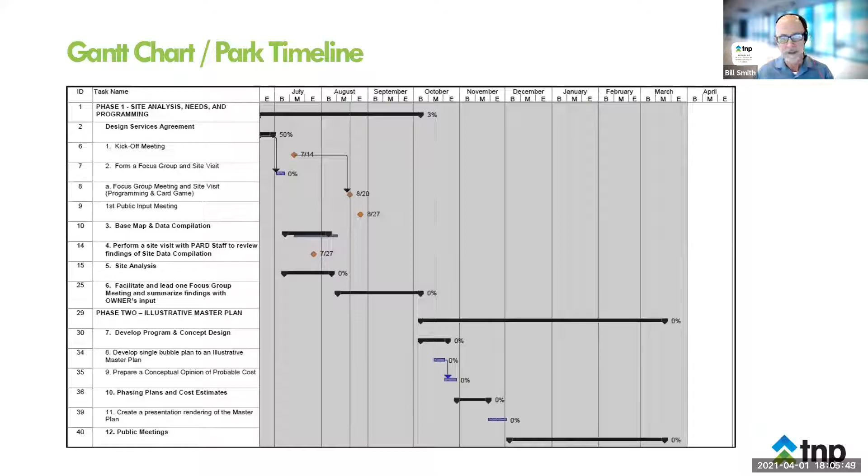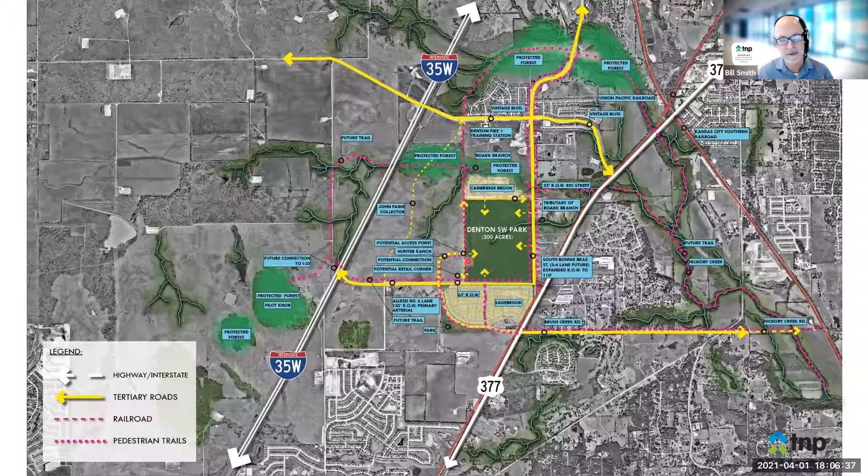You notice there's an assortment of green blobs around the site — those are protected forest areas within walking distance of the site. These little purple dots are all connected future trail systems. Hickory Creek will have trails coming that connect to our park and through all these future neighborhoods.

Of the 4 roads around the park, we think Allred will be the busiest. We proposed a road to go along this west side because it's much easier to manage a park that way — it's safer, with more eyes on the park as people drive by and see it, and it's more accessible. So for that reason, we proposed this, and it works well with what Hunter Ranch is also doing. These other 3 roads — this one's existing, Allred's existing although unpaved, and this one's proposed and being built as we speak.

Again, you can see the purple dots, these kind of magenta colors — those are future trails. They'll connect to Hunter Ranch, all up and down Bonnie Brae and down Hickory Creek, and also the subdivision to the south.

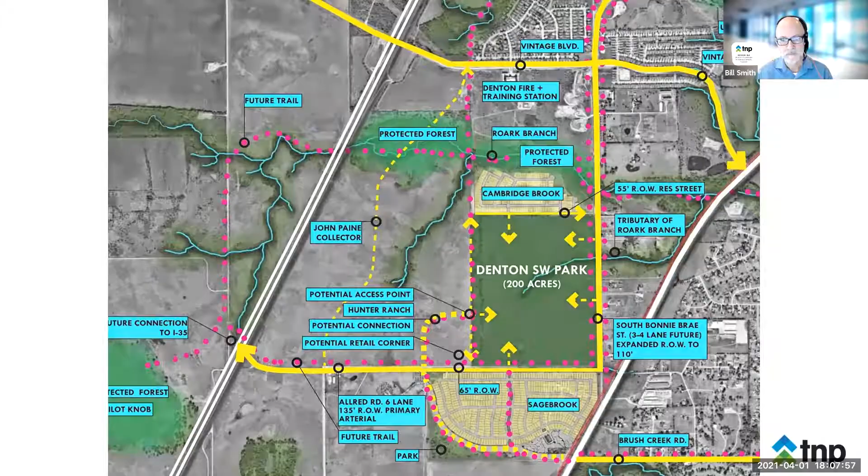So what we did in phase one was that we did a lot of polling of the public, and we're going to talk about that now. Mick, feel free to kick in at any time. So what we wanted was a balanced approach. We didn't want to get all our data from one place because then that might skew it.

So the first part, we had Denton focus groups, public input, surveys, and the Denton Parks and Recreation Open Space Master Plan, which is ongoing. We also looked at best practices: what do we know that works in the industry from doing park systems and parks throughout the decades? What works? And then also balancing that with executive input from the Parks Department, Park and Recreation Board, and the volunteer focus group. You just saw that list a moment ago. So all those things, we find it's safer and more accurate to do a balanced approach.

So the data collection included 1,200 general resident responses and online preference surveys. It's part of the master plan, the park system master plan. We had 2 public input meetings where people responded online and ranked in order of importance the things they wanted to see go in the park. And then we had 2 focus group meetings where members representing different parts of the community also ranked different program items that might go into the park. And then we had emails, phone calls, face-to-face discussions with citizens throughout. So we were really trying to hoover up as much data as we could so we could get a broad representation of the city.

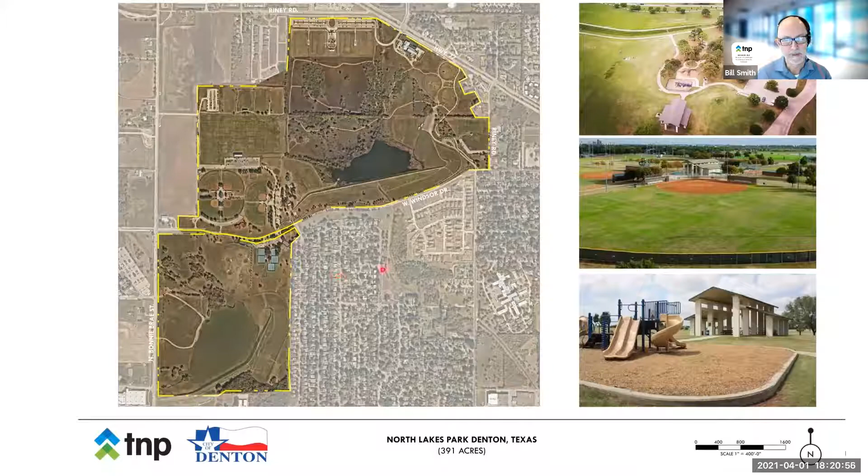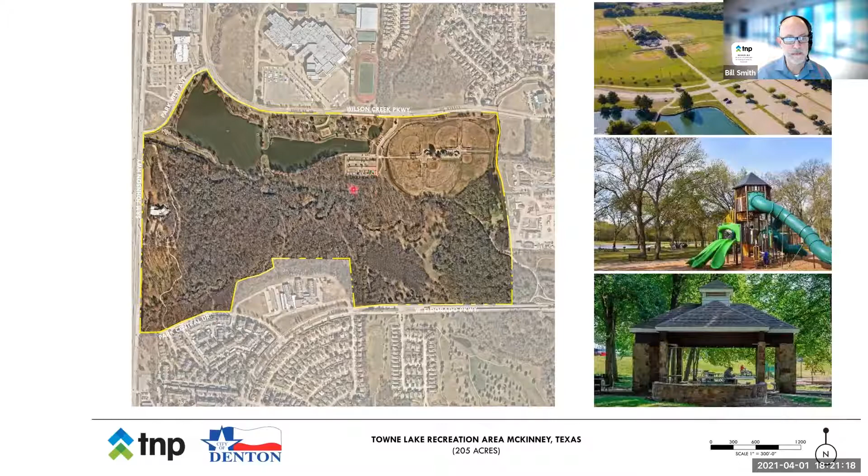And then the next one is Towne Lake in McKinney. It's almost exactly our size, 205 acres. Again, it's a mixed use. We find that with a lot of these large parks, a diversity of uses works well. It helps them balance out, so there's something for everyone there. You can see this one is mostly natural at this point, but it does have some active area for parking. Again, almost identical to our size site.

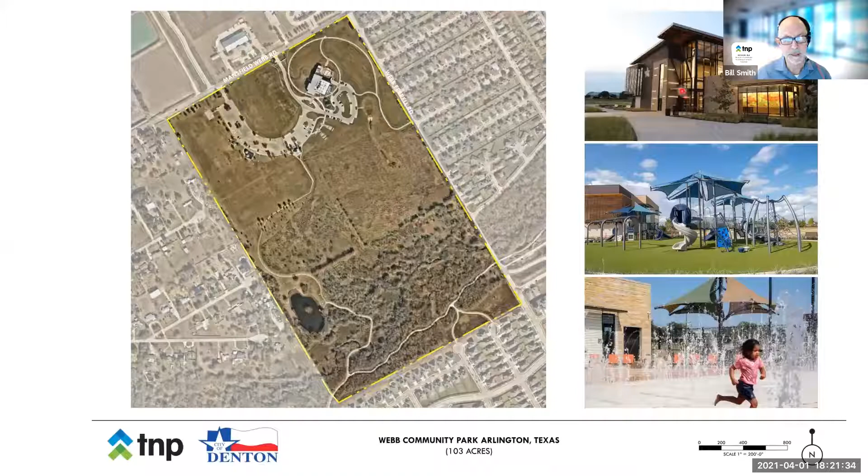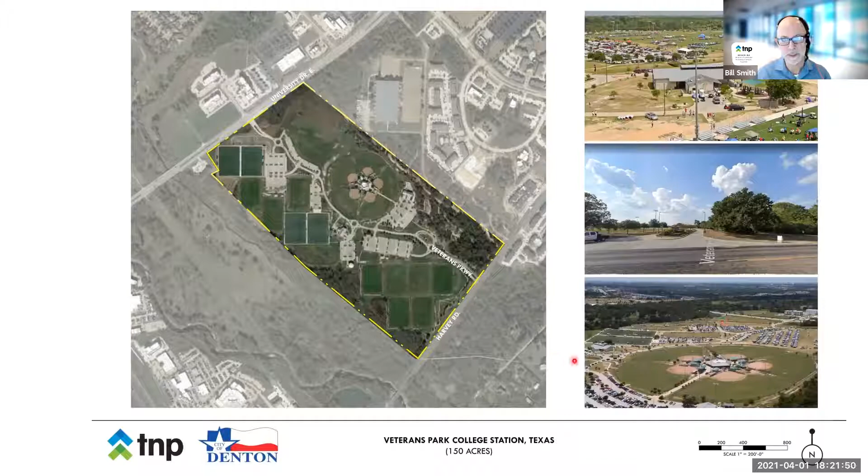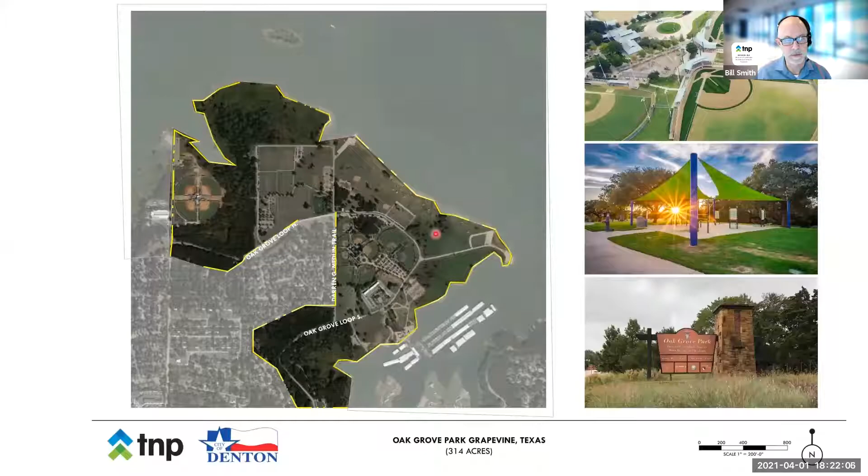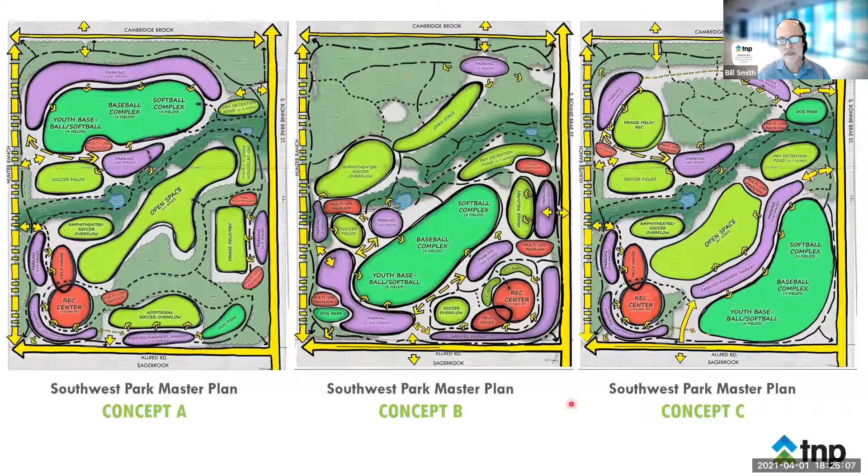So then we went and took it to the next level, and that's where we started to actually develop a plan. I'm going to show you that, and we'll spend some time on it. We'll come back to this too, so don't worry if we go too fast.

So here's the master plan. You can see how this is really concept C, just fleshed out a little more. This is the more natural area on the north, and we'll get into that. This is the more active area here on the south with the baseball softball complex. And there's the indoor area here with the rec center here and this lawn you look down.

What you start to see is we have these axes, where you have this view down this lawn, and another axis through the center of this baseball softball complex across this redeveloped cow pond - now it becomes a nice little natural pond - to some pavilions across, and then a big blackland prairie. 150 years ago, this area was mostly blackland prairie. A lot of that's gone now.

So what does that look like? That looks like this picture here on the left. And I've got a PDF I'm going to go to.

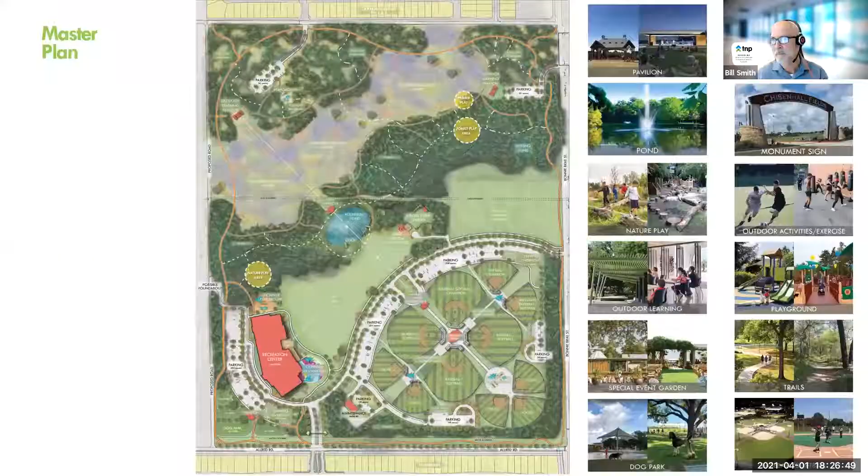Sorry for the pause, but I wanted to show you this PDF. It'll be higher resolution than what we had before. Can you see that? Yes, okay, so all right.

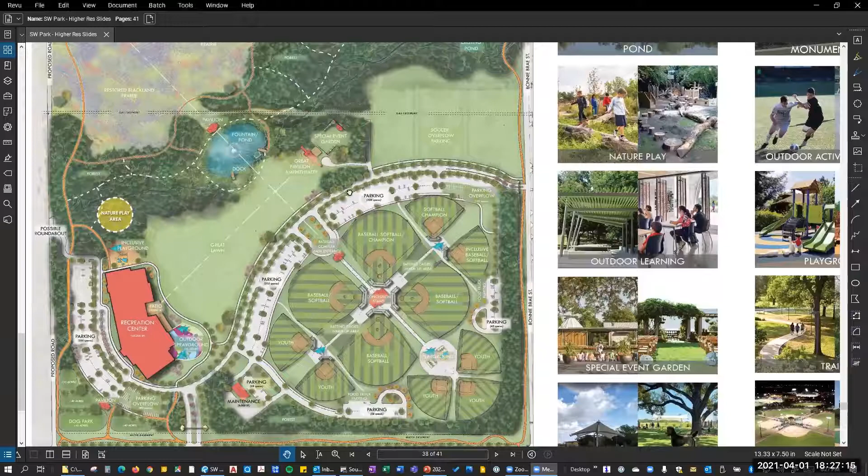So this is the plan overall, and you'll see this restored Blackland Prairie up here. So what does that look like? That looks like this right now in the spring. This is what Texas looked like for thousands, and maybe millions, of years before everything was developed.

Hey, Bill, can I jump in there for a second? Doing a master plan like this is a very good idea. It's important, so that we know how to manage this land. I just want to manage expectations by those listening that we want to see some Blackland Prairie come in. It takes a long time. It took eons for it to develop, and it didn't take long to destroy it. It's going to take a while to get it restored again.

And that puts a ton of pressure on guys like Drew and John from the Parks and Recreation Department. I just want to make sure everyone listening knows that's the intention, so it informs them about how they make decisions about mowing, pest management, that sort of thing. It's not going to happen overnight, it's going to take a while. But if everybody understands that and is patient, then we'll get there one day, and we'll all get to enjoy that.

Also, these wildflowers bloom certain times of year, and then the rest of the time they go to seed head, and they're going to drop their seeds and maybe look kind of rough, and that's just part of it. A lot of people might have a different expectation about that, but just putting that seed in everyone's head that this is going to take some time.

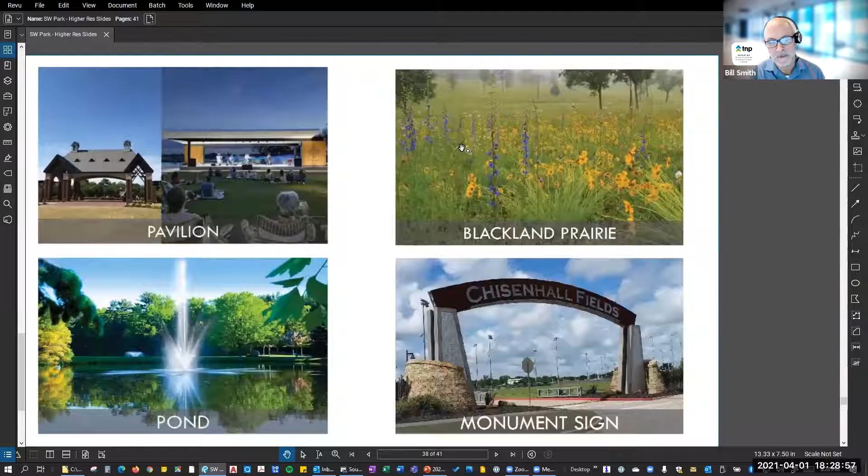So, all right, let me go back here. So you can see this great lawn here. You can see the scale — it's about a quarter mile from here to here, just to give you an idea of the scale.

And that's really important too, because people are going to want to gather — in small groups, and in large groups at times. This gives a lot of flexibility, that great lawn. And if you look at the way the parking is laid out, it's smart to put parking that's going to serve dual purposes, as opposed to just one purpose, serving here and here.

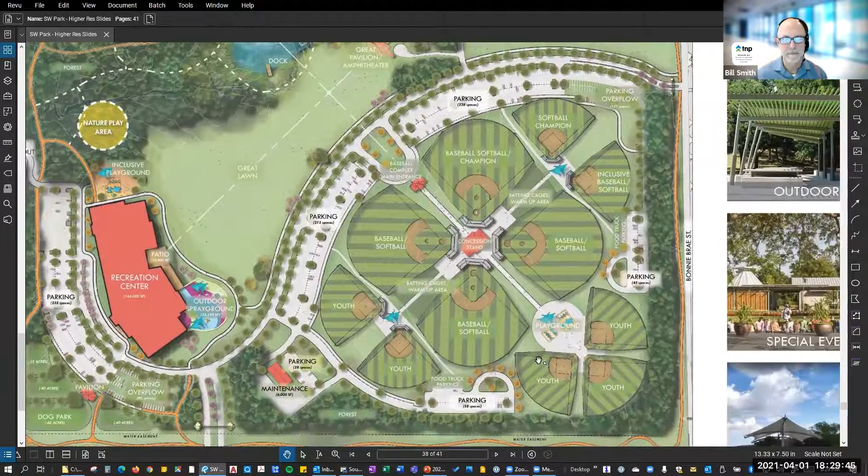I think that's where you were going, Bill — that athletics is going to require a lot of parking, but so could the great lawn, maybe at different times. The idea is to try to get it served, right. Yes, and it saves cost — getting dual use out of the parking saves the city money too. Because if this was only for the baseball/softball complex, it'd only be used when that's being used, but being used for both means it can be used all year round.

So here's the rec center. We'll talk some more about that, with an outdoor spray ground and an inclusive playground here. There's a dog park located here on the corner. We think this will be very popular.

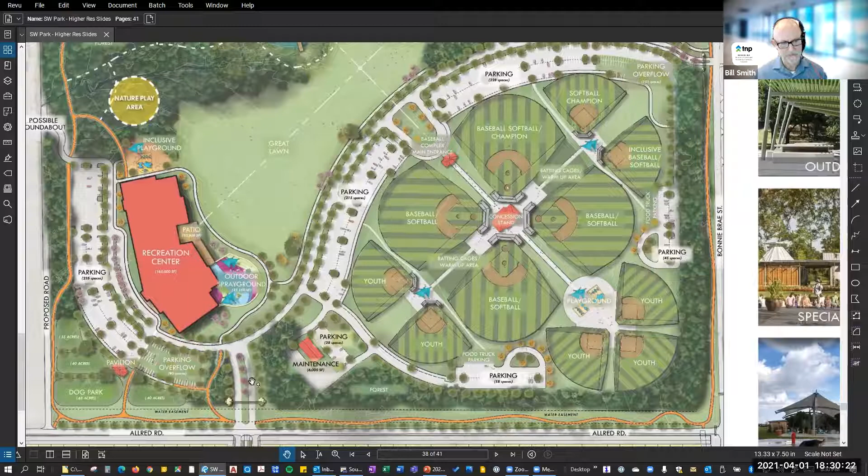And that's how cities are put together in big planning modes. There's a retail component across the street that's proposed as part of the future development. So you can imagine if you got your Starbucks or whatever boutique coffee, or maybe lunch, and you take your dog, you can go over to this park that just feels like it's got a good urban-to-suburban connection to that retail, which we think is going to be a driver and really help both the dog park and the retail.

Kind of a good idea there. You can get a sense of the scale here. These are individual lots on this Sagebrook development that's going in.

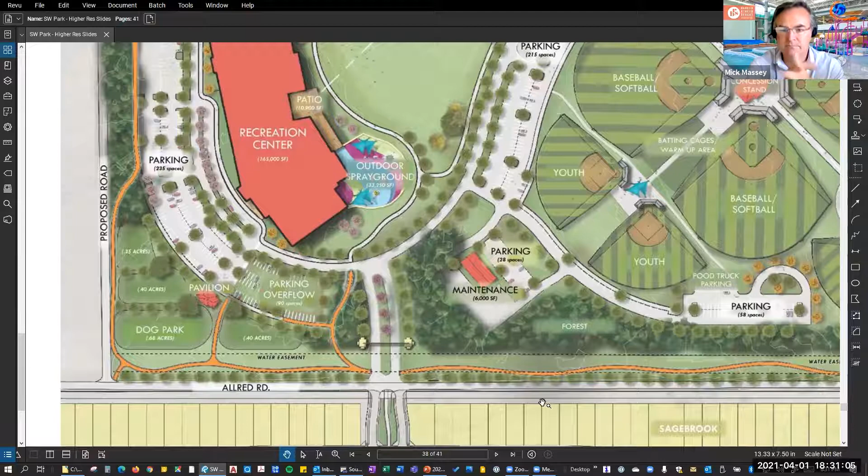Drew, you wanted to say something? Yeah, Mick, we found out earlier this week that may or may not happen in that corner next to the dog park. That'll be a future discussion with the Hunter and Cole section. And that's a very good point. This is a conceptual master plan, and things could change over time, like you just pointed out. So we all have to keep a mindset that we're going to be flexible and try to get as many of these elements to come together. Thanks for bringing that up, Drew. That's a really good timely point. Things will change. We can say that with confidence.

This is the maintenance building. We want to locate it close to these fields so it makes it easy to maintain. And that's really important. If you want a nice park, you have to have a good maintenance facility.

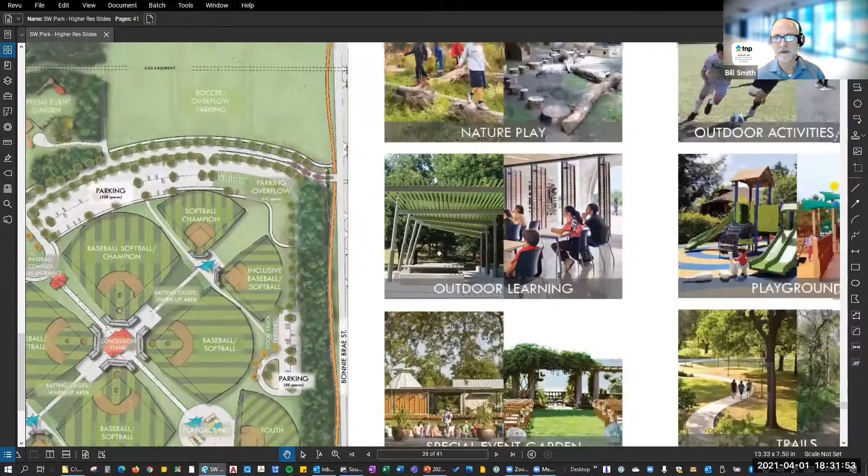This is the entry here, and you can see this grand kind of entry. So what are we talking about with that? You saw this monument sign, something like this, Chisholm Fields. It makes a real statement about entry.

The pond, this is about the scale of the pond we're thinking about, and the fountain is about the scale we're thinking about.

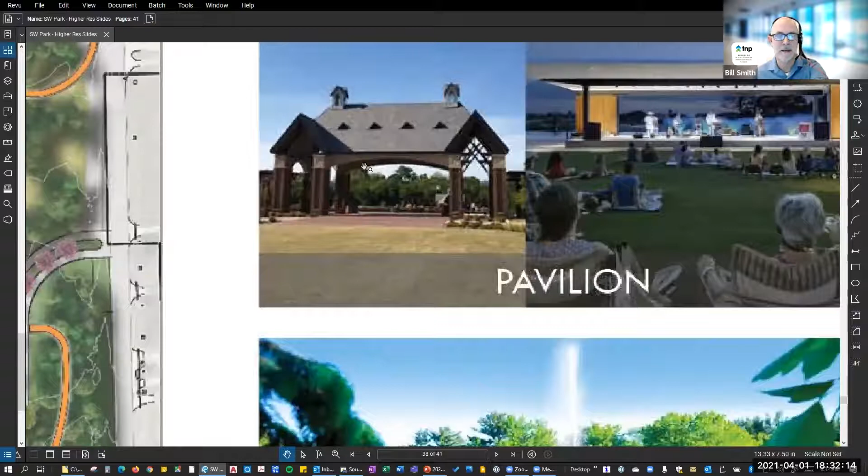This is a pavilion, and this is about the scale of the end of the lawn. If you look down the rec center a quarter mile away, you'd see something like this scale to terminate that view and provide an outdoor amphitheater.

This is what we mean by nature play, less structured, more naturalistic materials where kids can use their imagination. And outdoor activities, Mick talked about outdoor activities happening outside the rec center. This is a good example of that.

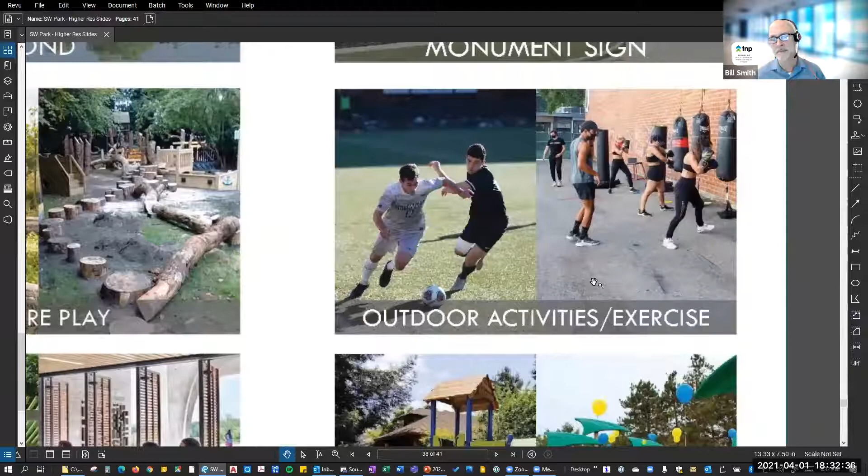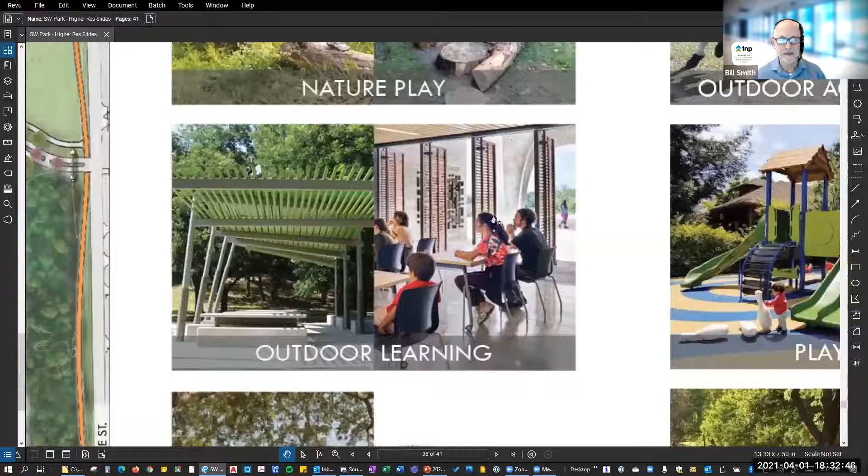Playgrounds, both regular and an inclusive playground is what we're talking about for that. Outdoor learning can be something that's completely outside or something that's indoor-outdoor where you can use it for education.

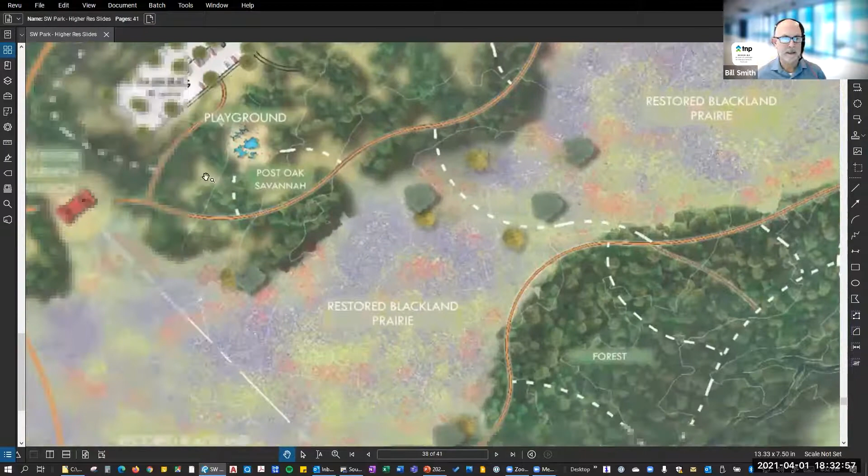And let me show you where we have that on the plan. We have both here, outdoor learning pavilion here, here, and it could even be part of the rec center also there.

So Bill, can you show the soccer football fields? Yeah, there's the soccer, 3 full-size fields here. Could also be used for overflow parking if you so choose. There's a gas easement here. You can see those dashed lines. You can't see it at all, in fact. But there's a gas easement that goes through that.

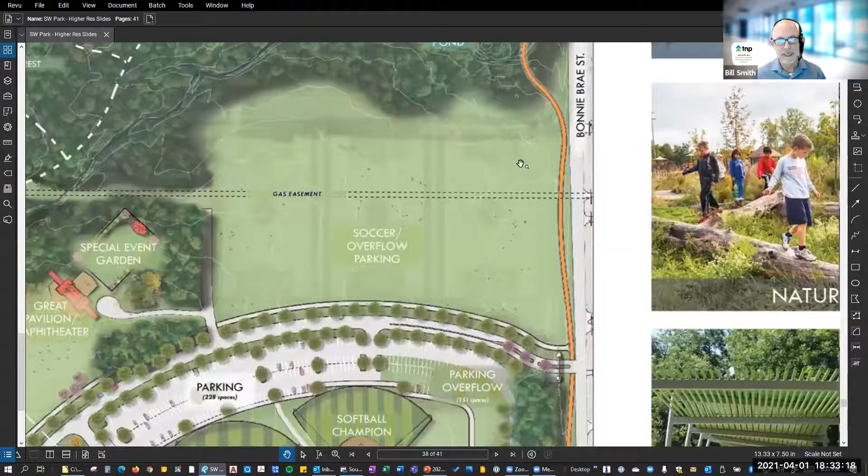So we located that here. So if you did have a big event, say 4th of July, on the lawn here, you could once or twice a year use this as overflow parking if you decide to.

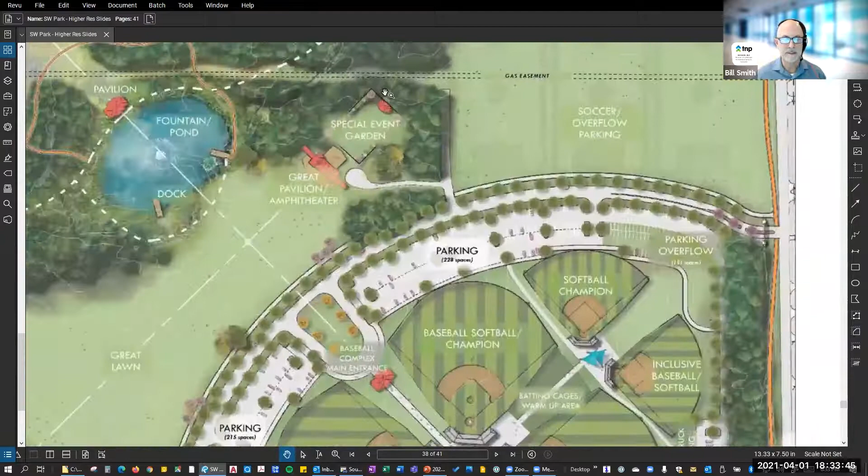Then behind this, again, one of the things we're trying to do here is get as many different things in. The special event garden here, small, maybe a formal garden behind this great pavilion. The city can rent it out for weddings or graduations or whatever.

And we're thinking something like this for special event gardens, something more this scale, which could be more like, I think John said earlier, a botanical garden. This might be a more highly maintained space where there's things in bloom, where people want to rent it because it's really pretty.

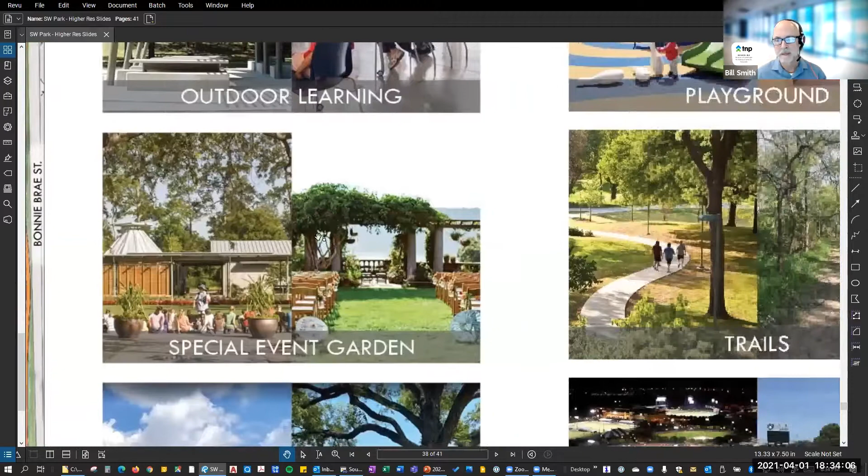And then we talk about trails. We have both paved and unpaved. On the plan, we've indicated the paved trail in orange. You'll see, first thing to notice, there's a 2-mile, almost exactly 2-mile loop that goes all the way around the park here. And then these little white dashes, those are intended to be unpaved. We have both of those.

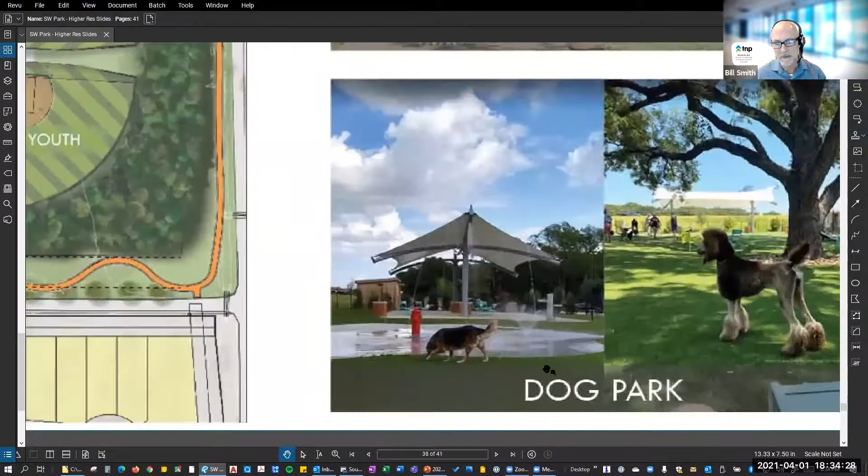And then the dog park, this is the one in Grapevine where you have the synthetic turf. It's very popular. They have both synthetic turf and regular grass. The synthetic turf proved to be a lot more popular with the owners, at least. The dogs don't really get a vote.

And baseball, softball here, and you know what that can look like. Let me just go through some more elements of the plan, and we can come back to it later.

Again, there's the maintenance area, but then we snuck in a couple small parking lots here for the baseball and softball complex, where if this is phased, you might build these 4 fields first and build the other fields outside of it.

Right now these are envisioned as synthetic turf, but they could be synthetic or natural turf depending on what you want, with a big concession stand and a big entry. We've opened up the parking lot here, so there's a sense of arrival with ticketing so you can control access.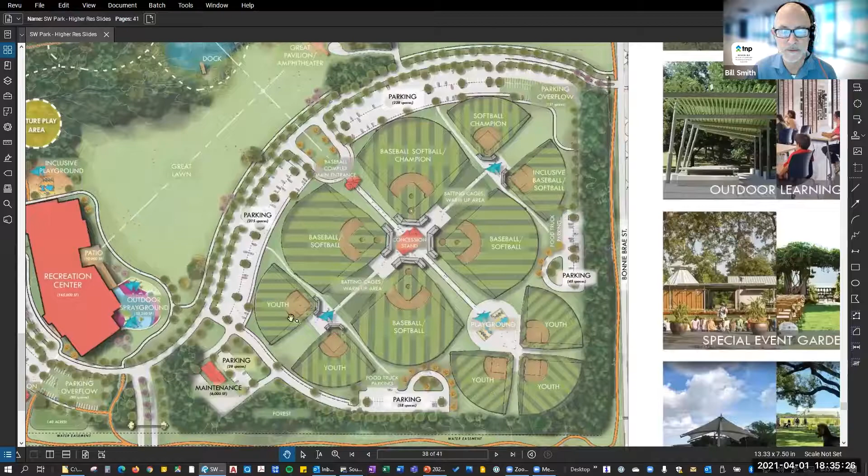So we have 4 large fields and 7 smaller fields on the eventual build out. Again, that might take years or decades, but you can plan it at your own pace.

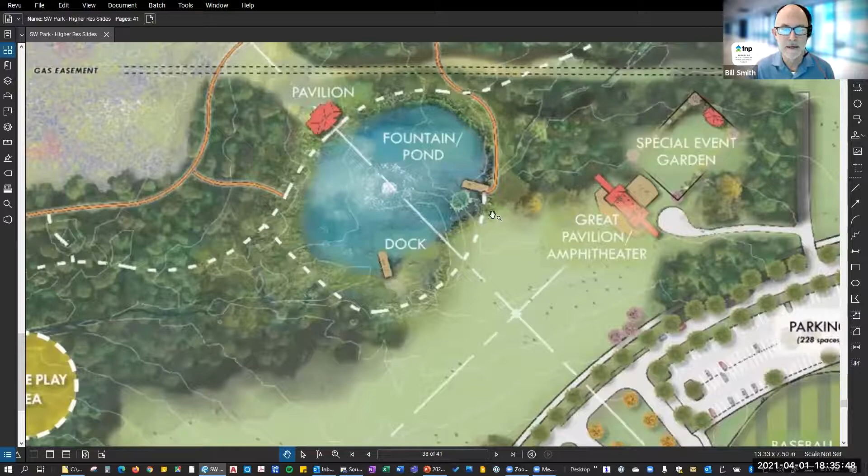And you can see this axis, it's a playground, so there's something to do for other kids. This axis goes through the park, and then this pond here, there'd be a fountain with a pavilion to terminate the view across there, some docks. You can do fishing if you want.

And then this forested area, we're going to reforest this area around this ephemeral stream. So as you come to the north, it becomes more natural, and at least half the park is more natural, and that was by design. There's the forest play areas, we'll see some images of these in a moment. The restored Blackland Prairie, Post Oak Savannah, parking, and outdoor learning pavilion here.

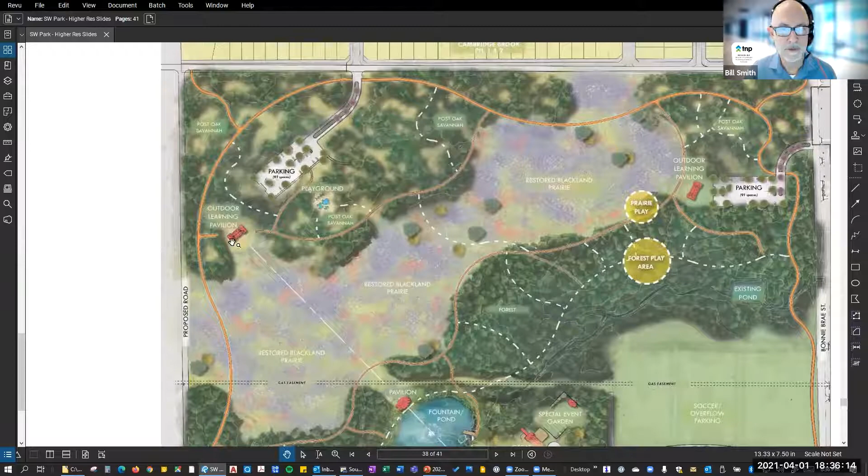So it meanders up to this other neighborhood. Can I talk a little about reforestation? I was just going to ask if Bill wanted to talk about how these trees that we see on this plan are not here today. They are not there, right. Yes, thank you, that's very important.

Right now, today we have a site that ecologists, when they look at this, will tell you is a disturbed site. That means it's not virgin land, not like it was 150 years ago. It's been disturbed and became pasture land like most of North Texas. That means the Blackland Prairie was tilled up or overgrazed, and so you get things like mesquite. We see a lot of mesquite there today, and a lot of junipers, and that's a sign that it was overgrazed at some point.

So when we talk about restoration, we're talking about a process to go back in time to restore it to what it once was, and that takes time. Eventually the mesquite and thorny trees that are there will be replaced with things like post oaks, blackjack oaks, chinkapin oaks, and the prairie grass, as you saw. That takes time, it's going to take some time.

Those trees, ecologists call it climax species, a species that once an ecosystem reaches a steady state and self-perpetuates, that's the climax state. For North Texas, that was Blackland Prairie and Post Oak Savannah. So it's going to take some time to restore that, but that's what we're talking about.

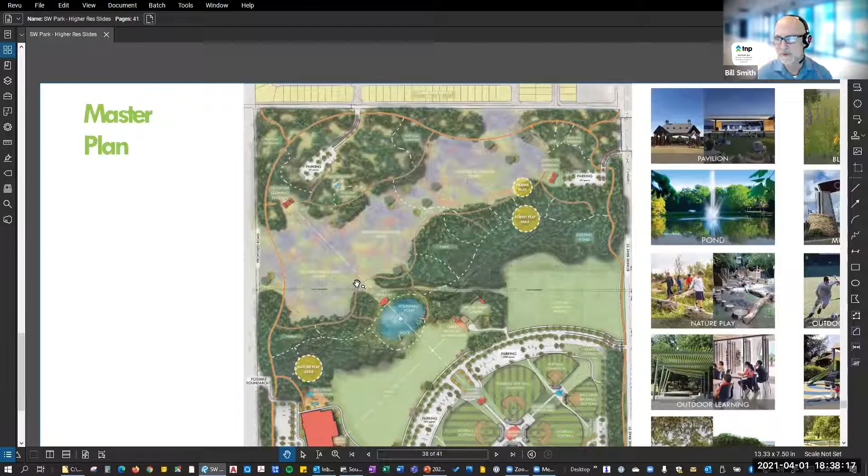Did that answer your question, Drew? Yes, sir. So again, think long-term process. For us, 10 or 20 years is a long time, but for a park and for a tree it's a very short time. All right, I'm going to go to the next page here.

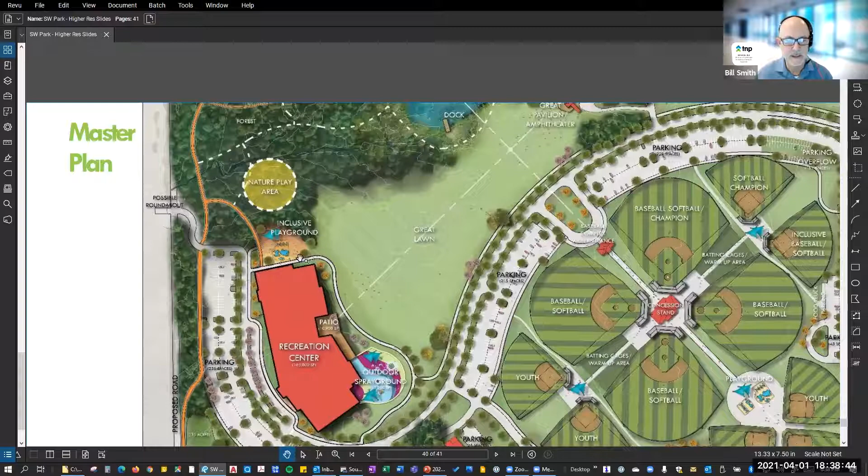This looks at the north side a bit more, and you see that gas easement, the axis that comes through. There's the south side, again with an outdoor spray ground and the inclusive playground, which might become quite a bit larger there. It's nice because it's connected to the rec center, so you can have bathrooms and things associated with that, and if the weather's bad, kids can get inside.

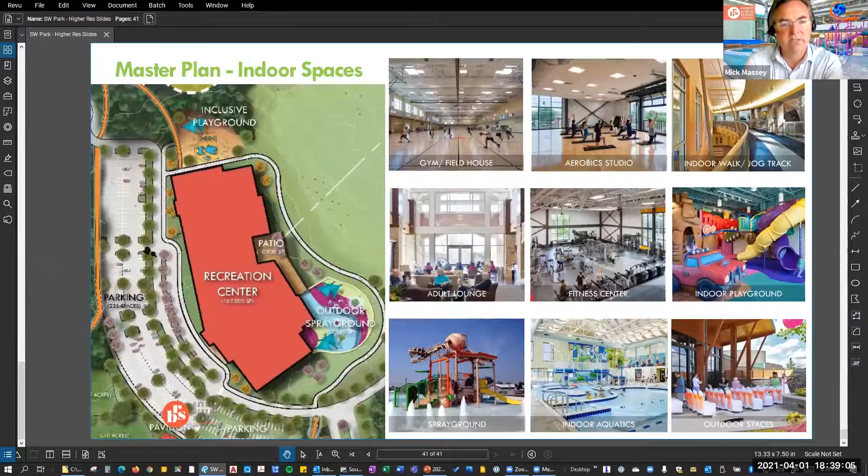So we talked a little bit earlier about some of the bigger elements, such as you see in the upper picture on the left, the gym field house. You can kind of see that's multiple courts indoors, and you know the value that brings to a community. Aerobics and dance studios can be used for lots of things, including spin and others.

But the idea we're seeing more and more is that indoor-outdoor connection. This particular image happens to be a project we did in downtown Denver that was on a floor you could see out from, and people there in their climate could enjoy that door open quite a bit. We'd want to keep our climate in mind here, but that idea of indoor-outdoor connection.

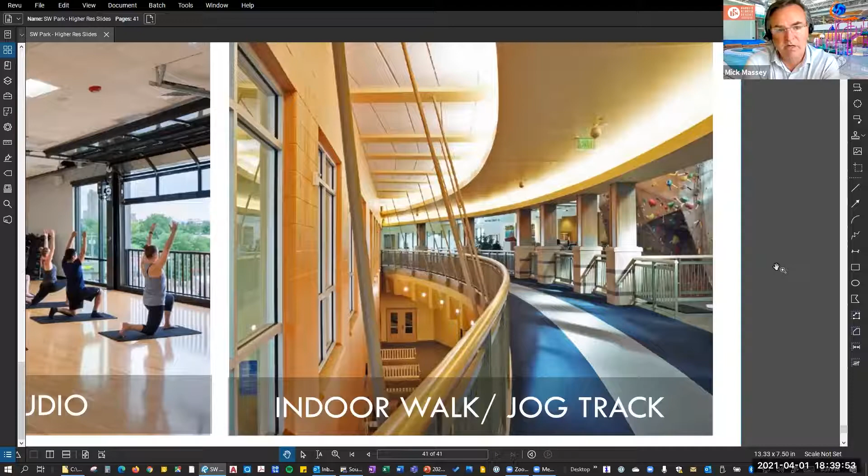And then the next one you see is an indoor walk jog track. This is popular with just about every generation. It's going to be a big component, I believe, of your community to have a really robust indoor walk jog track. I think it's a good decision on the public's part that they put a high priority on it.

Looking at this is just an example of an indoor playground. This one happens to be in Grapevine, Texas, just down the road from you all. They chose a theme that was sort of fitting with planes, trains, and automobiles, which happens to be Grapevine. I would imagine that Denton could theme the entire recreation center. Lots of things come to mind about Denton. So the imagination will probably take us to what it needs to be themed as.

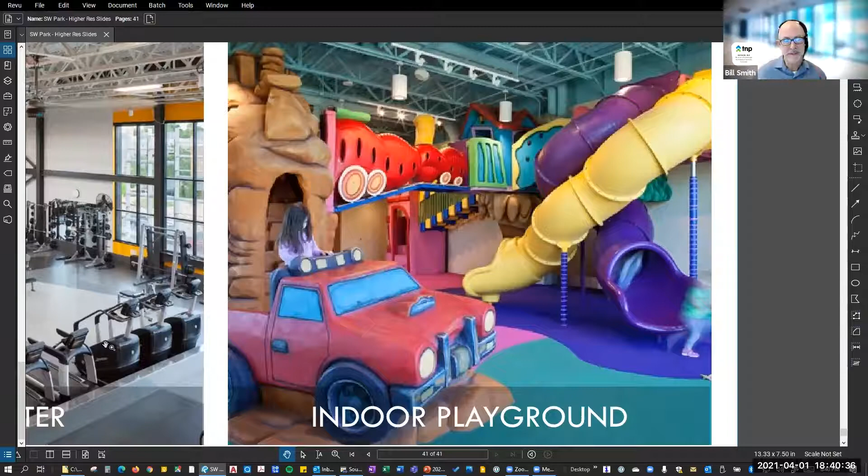Music is one thing. Yeah, music. It could be the birds, butterflies, and bees. There's just so much in Denton that love of nature. Who knows where this could go?

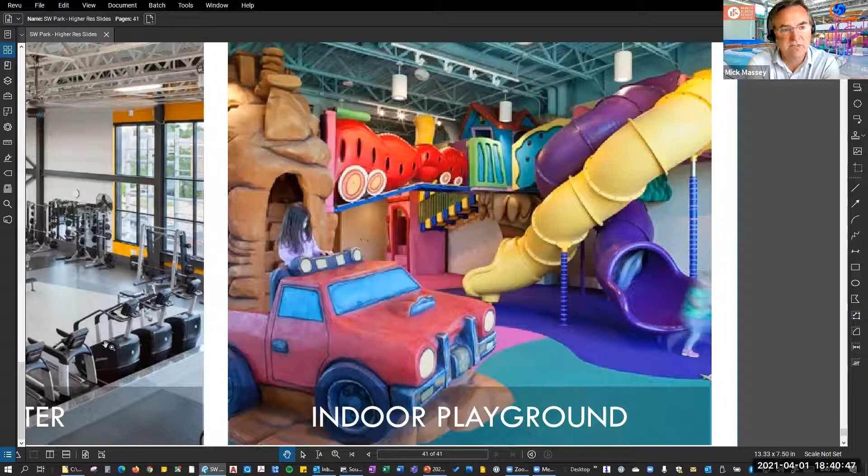Then you see adult fitness. One of the common things we find in adult fitness is lots of air movement, lots of light, and lots of headspace. If you look at this picture, one thing that's going to change about every 3 years is that equipment. We're finding equipment isn't getting smaller, it's getting bigger and more technical, so each piece is likely going to need its own internet connection and power. Also visible is stretching space, where you can get off a machine or stay on one and still stretch. Adult fitness has evolved over time, and you can also see strength training in this image.

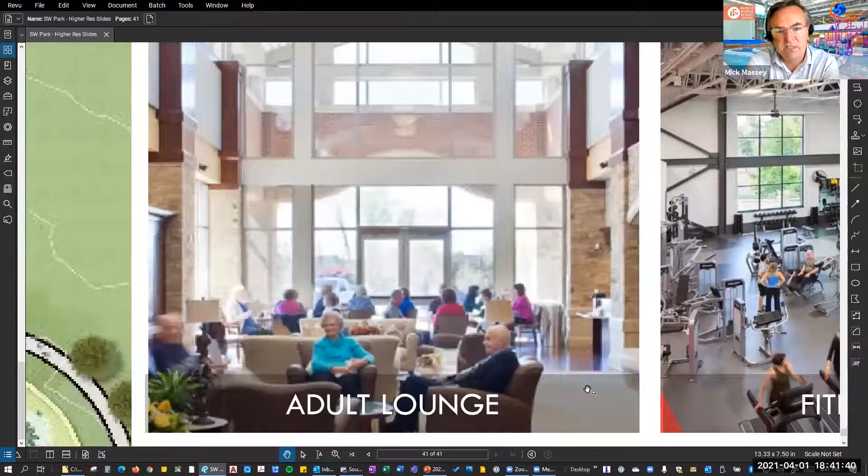Moving over, the next is an adult lounge. We're seeing senior centers and senior activities where there are seniors, and what we call junior seniors. Junior seniors tend to be a little more active, and seniors tend to be a little more social, with cards and things like that, knitting classes, that sort of thing. So we're imagining this recreation center is going to likely take care of both, and an adult lounge is definitely part of the future in there.

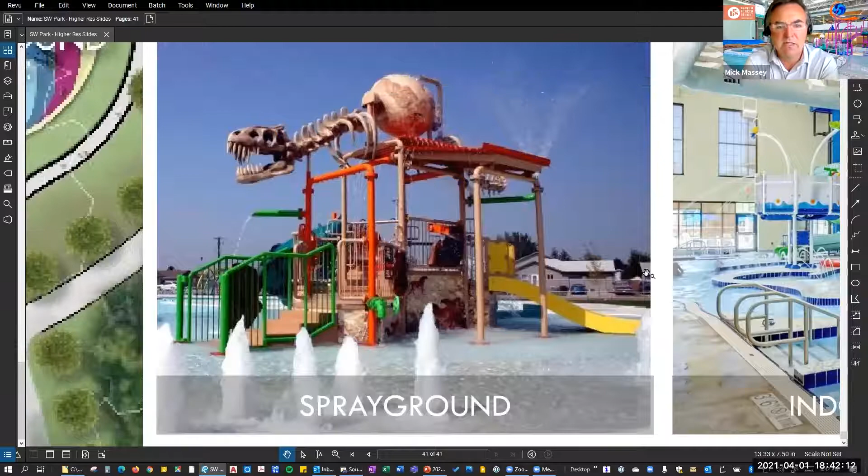And then an outdoor spray ground is planned for in the master plan. We'll see how that goes over time. It's just adjacent to the recreation center, as well as indoor aquatics. This happens to be an image of leisure water. Another component we've heard from you all is lap swim, and this is not necessarily competition swim, but lap swim is more about exercise and fitness. We're seeing a lot of that kind of water come into these recreation centers.

And then adjacency to outdoor space. We know there's a need for an indoor event space, but having an outdoor events option usually pays off very, very well as part of the consideration. So that's kind of a glance at some of the indoor components.

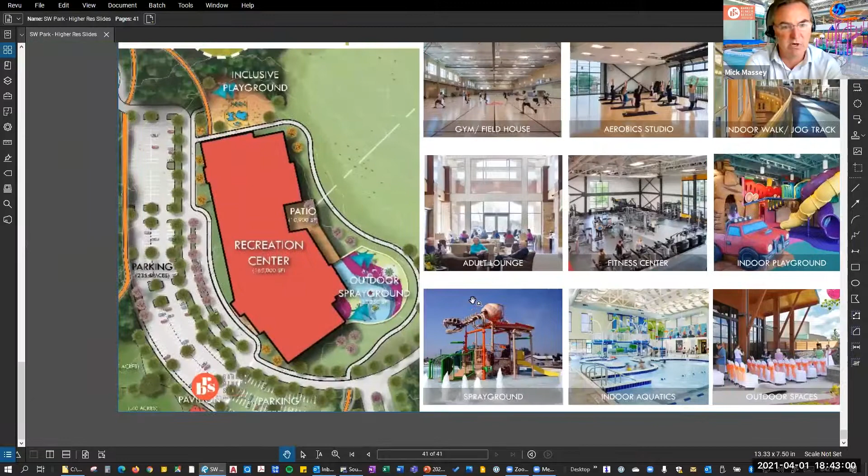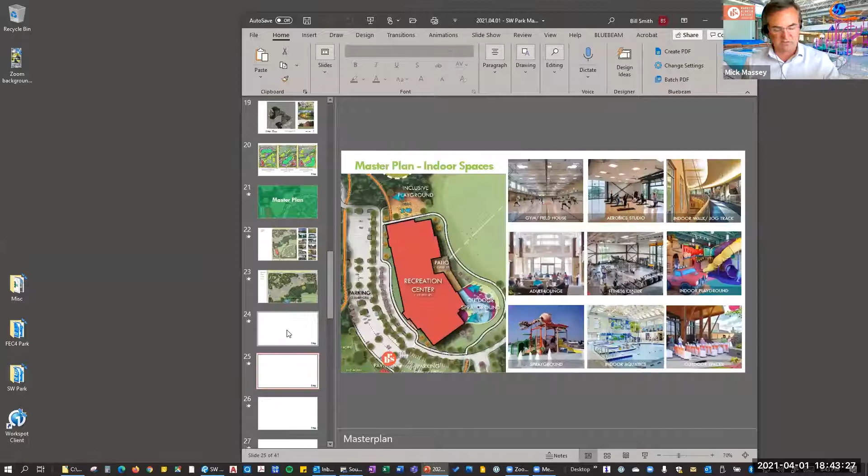Again, I just want to remind everybody, this is an exercise in patience as we look at this, there are a lot of elements in this park that are going to be competing for funding. So we want to give good feedback about where the priorities are, so that as funding becomes available, staff, council, and park board know where to put their resources to make these elements come together. So it starts with the master plan.

And that's what you have here. This is the final draft that we're ready to take to the city council next week. But this is our opportunity to hear from you all, to see, did we hear you right? Are we representing this correctly? What is it that you are excited about? What is it that you would like to see different? So please email, or type it up in the chat area. I really recommend typing it up in the chat area, because then we have it in record form.

So Bill, back to you on some exciting 3D looking graphics. Can y'all see the perspectives? Yes. Okay.

So these are some images. This is in the baseball softball complex looking northwest.

And this is a playground, because when you have a baseball softball complex, not every child needs to just watch—younger children need to play, or they get bored. They're there all day for a tournament. Drew and other people I know do this, going all day. So it's important to have other things to do for the kids that are not on the field, and even for the kids that are there when they're not playing a game.

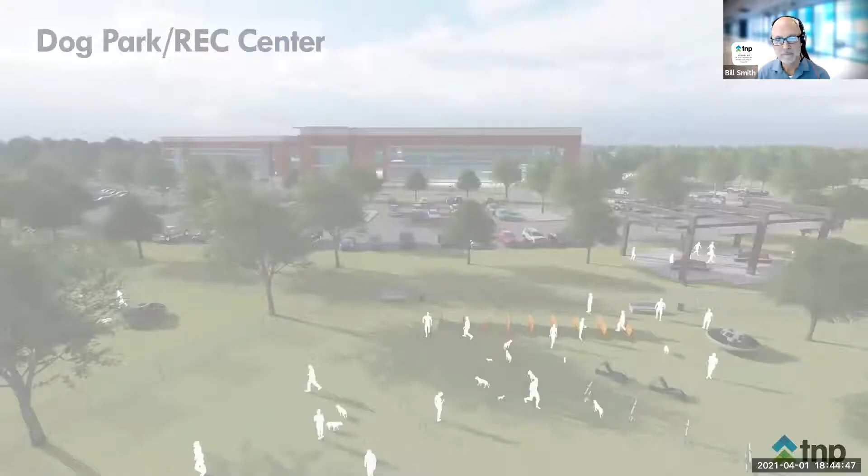This is the dog park. We're looking towards the rec center now. We have not designed this building, okay, so don't think this is what you're building. This is simply about the size of what we think it might look like. It might be a 2 or 3 story, so it might be similar in scale, but it might not look anything like that—it's about the right size is all we can say at this point, if you decide to build it all out. And the dog park will have different paddocks, so for maintenance you have 2 open and 2 being cleaned at any given time.

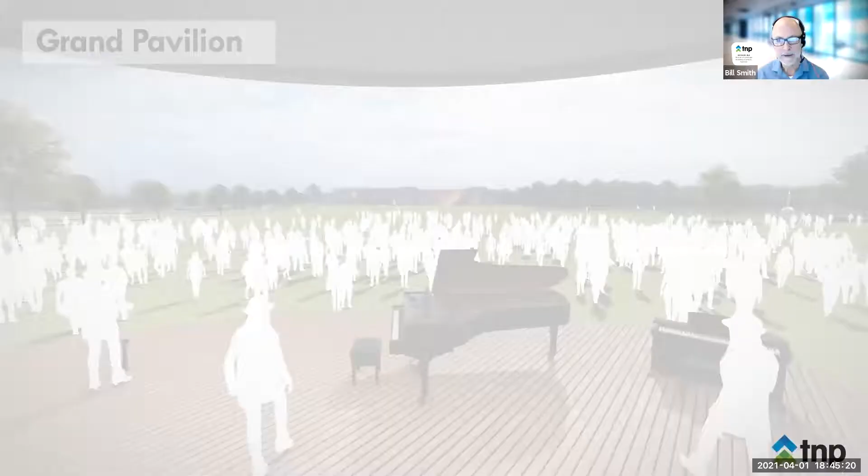This is the amphitheater, looking back towards the rec center, and that's that quarter mile view. Let me get my laser pointer back—you can see the pond over here, the baseball softball complex over there to the left, and that's the rec center. And you can get several thousand people on this lawn for 4th of July if you want, for a big event, or it can be smaller.

And on the back side of this, I don't have a view of it, that's where that small formal garden is that you have for special events.

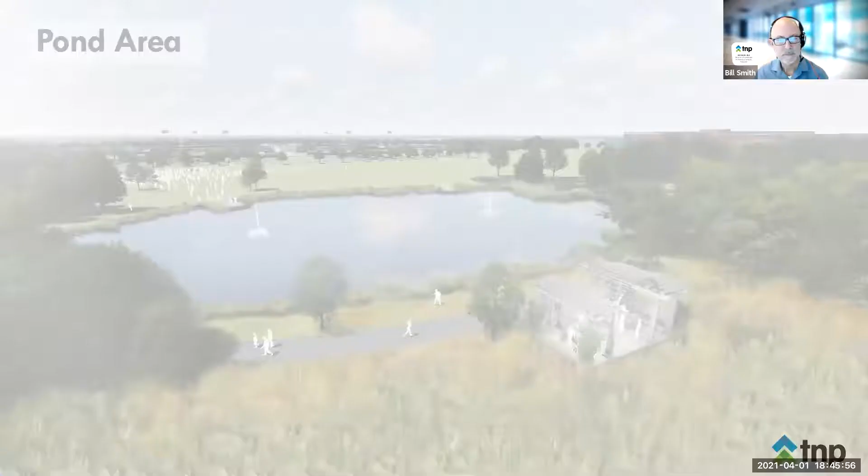And there's the pond there, the little pond. The thing we were just looking at was right here. There's that group of people, and that last view was looking down this way to the rec center you see there, and the baseball softball complex here. That axis comes through the park, through here, and the Blackland Prairie is down here off screen to our right. So that's the pond there with a very naturalistic shelf for plant growth and fish. And then the next one.

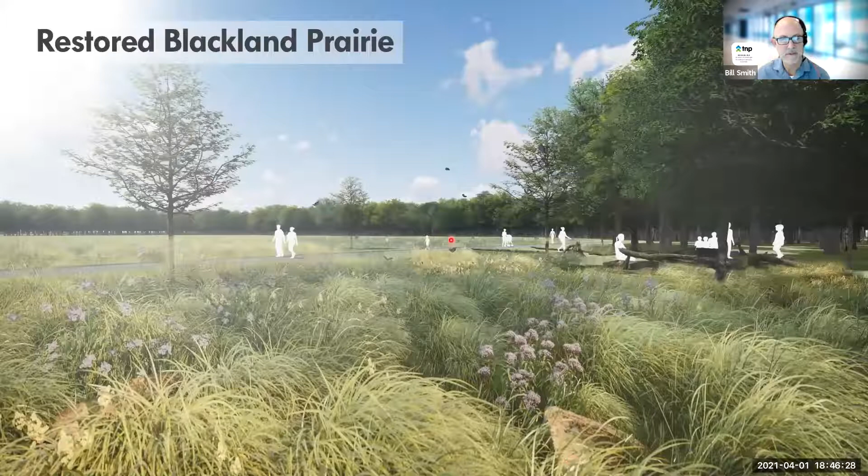This is the Blackland Prairie here, restored. This is a scale of what that space looks like. This is the forested edge. The ephemeral stream would be in here somewhere. You can see the natural play area here at the edge of the prairie.

And this is, as Mick mentioned, the prairie, and it goes through seasons—that's part of it. This is it in springtime. In the summer, it's going to get kind of brown and crunchy. That's an acquired taste—I like it, but it's part of the natural life cycle. It has to go to seed in order to propagate itself.

So when we're telling people how to maintain this, you really want to mow it about twice a year. Once in August or September, after it's gotten dry and rattly and gone to seed, you mow it and let those seeds scatter. Then you might mow it again in February. So you want to encourage that natural process.

So by having a master plan like this, it informs the decision that we're dedicating ourselves towards Blackland Prairie restoration and reforestation with indigenous hardwoods. That informs the staff and future leaders that we're committed to these things.

That means it may not get mowed. It may get mowed and then baled, where that biomass, that leftover grass, isn't left to just simply sit on that prairie. That did not happen in the old prairies—it would burn. And since we can't burn, we can remove part of that biomass. A lot of times it's baled and taken away and used for other purposes.

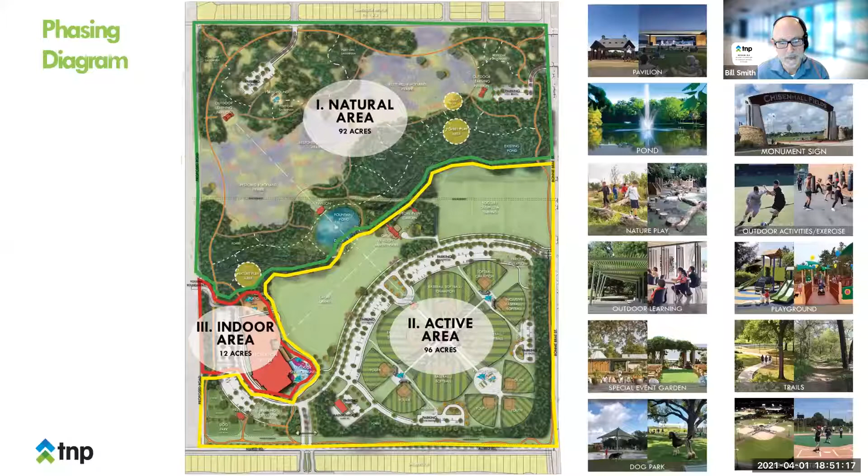But any questions or anything, you can direct them to him or to Drew or John, if you have any. And I think now we're going to open up to questions and comments.

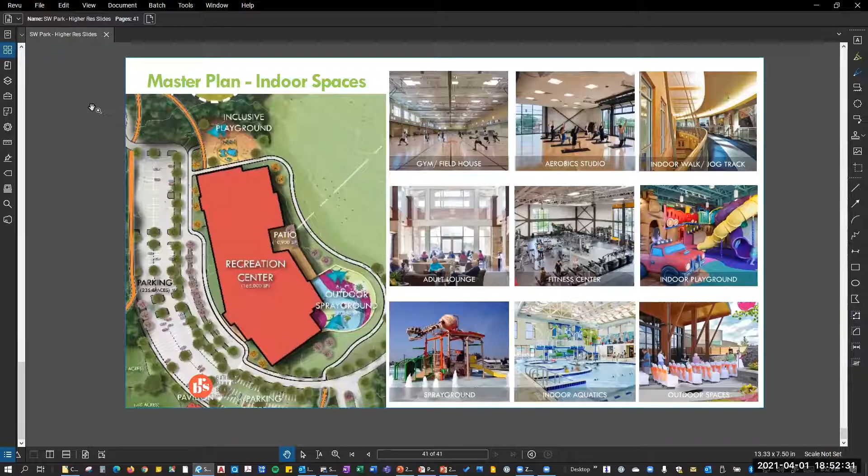Bill, while you're doing that, a couple of people had some questions in the Q&A, and we've answered quite a bit of them as it goes. I know that one person, Ermi, has a request on tennis courts, and then we're just redoing the Goldfield Tennis Center, which is up in North Lakes Park. We don't have currently another tennis center in Denton, but we used to do USTA leagues and various things out there because we had enough courts.

This is not a construction document, it's a guiding document. It's sort of like a plan of your vacation, where you're going to go. You might change your plan as you go, though.

To tag onto that, at the other public meetings we've had on the Southwest Master Plan, we really try to iterate that we do not have funding for this park. We had funding to master plan it. We're at this stage now where we're going to council soon to show them this master plan, show how far we've gotten, get their input, just like we're getting everyone's input from our residents and our focus group, and really go from there.

For funding, this will either come from a bond and grants. We could put a plan together like we've done so far, finalize it, and get it to where we need to be able to go after those Texas Parks and Wildlife matching grants. So if this park costs $150 million, Texas Parks and Wildlife could pay for half of it, and we're only paying for the other half. There are other types of grants besides Texas Parks and Wildlife we could go after, but that's one of the biggest ones for a park like this, and for all our other parks.

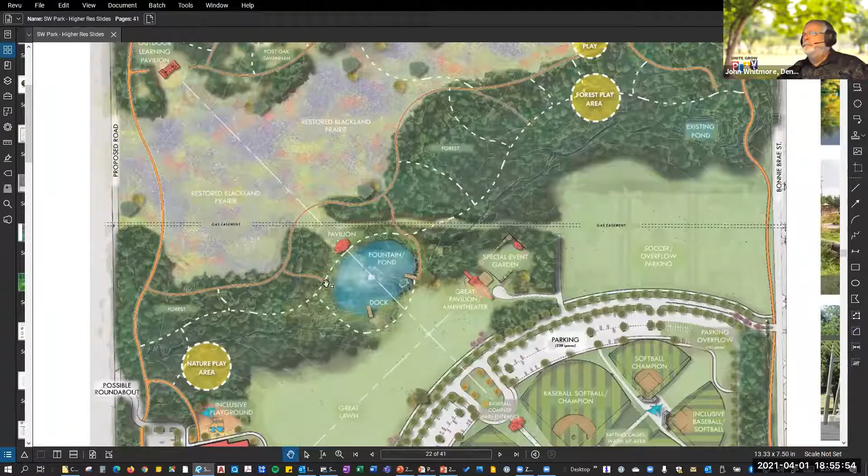While we're waiting for people to raise their hand, I wanted to speak on a few things sustainability-wise. I know Dr. Liang had a few questions about sustainability, and really we're looking at carbon sequestration and other things like that. That's why we want to do the tree planting, and we want to do the Blackland Prairie.

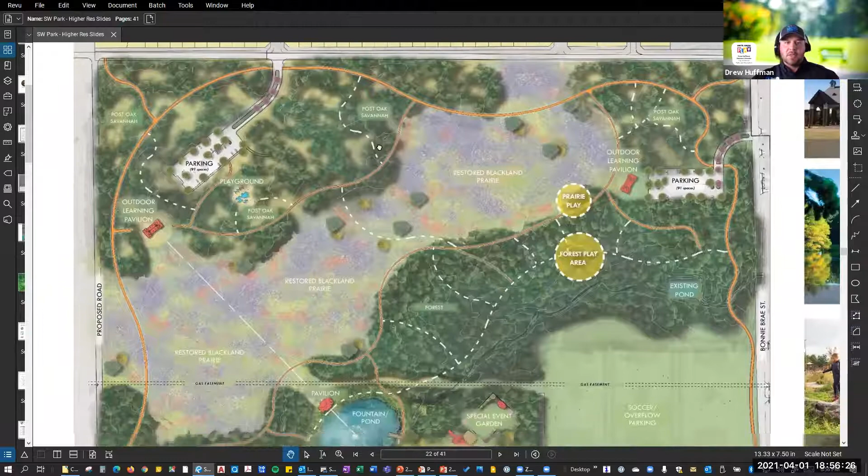Bill, can you show the green parking, the sustainable parking areas? We just have some small spaces shown now, really to get a footprint in and say this is what we can do as far as permeable parking goes. We anticipate hopefully building our first green parking lot at South Lakes Park, over by the small playground next to Teasley and Londonderry, where we'll have a parking lot but won't take away the green space - it'll still be grass. There's a special grid pattern you put in, put the dirt back in, plant the seed, and you can park on grass without damaging it, keeping that nice green space.

We're putting two other permeable parking lots in - one's going in right now at McKenna Park, and another hopefully will go in at the North Lakes Tennis Center when we start construction this summer. With all that, any and all your input we would love. I just wanted to make sure we showed that.

I've been meeting with the Dark Sky Association to make sure our lights will be dark sky compliant when we eventually go to construction, whether that's 5 years from now or 20 years from now. I really don't plan on going anywhere, so I want to see this one through for sure. And of course, technology will change between the time we're speaking now and the time we actually go to construction.

So as technology changes, all those different compliancy changes, we're on top of that. And we really like to make sure that we hold true to the industry, especially on the sustainable side.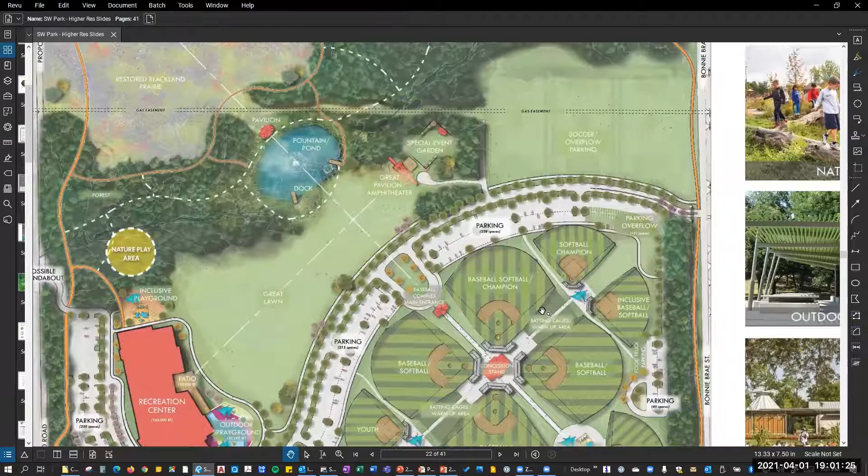And the soccer, because it looked just like baseball, so I feel like if you communicate on your plan that it could be used as multi-sport, that may get more support from other sports as well. Okay, that's a great idea, thank you.

And then we just finished our Vela Athletic Complex, which is 4 full-size soccer fields, and we have lacrosse, rugby, soccer, and football being played on those fields right now at North Lakes, on top of the other 20-something fields we have at North Lakes that are multi-sport.

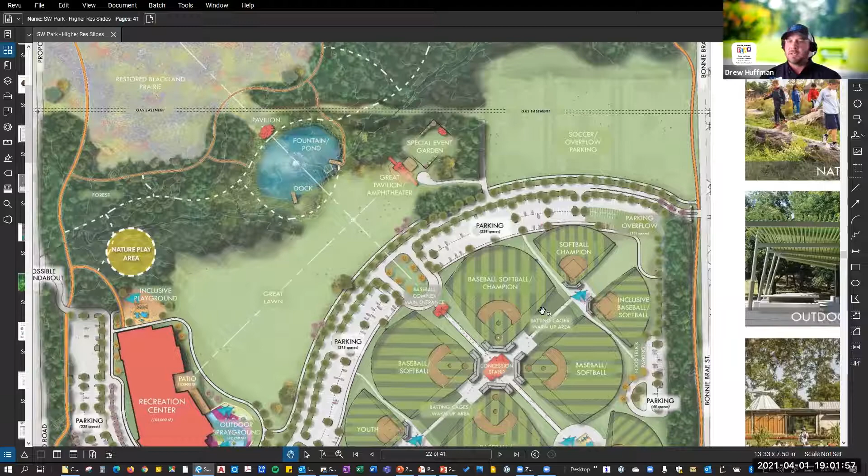Good question, thank you.

Hey Drew, we've got a question in the Q&A asking realistically how soon could all these things be built and ready for use?

I wish I could answer that question. And just to be transparent and really honest with you, we don't know when the next time we'll be able to go to a bond. Really, we're thinking we would obviously need to contribute funds to build this. We've started to look at partnerships, and of course we're always looking for grants. So ideally, possibly we could get the funding in 5 years and start construction maybe the 6th year. But I can't honestly tell you exactly when, not knowing when the next bond will be, if the bond passes, and what the grants will be at that time.

Drew, can I add some flavor to that, some color to the comments? Yes sir. I just want everyone who's listening to realize that as fantastic as this plan is and well balanced with nature, active zones, indoor rec, it is part of the park and recreation system.

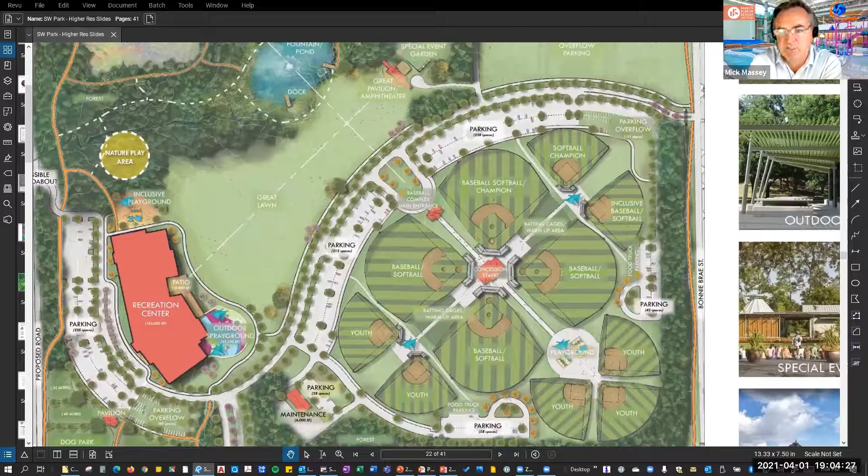Is that fair to say, Drew and John? Yes, very fair. I think I speak for all of us when I say if we had the money, we'd start tomorrow. We're all excited about the plan. We want it, but when the money becomes available is up to your council and you as voters, of course.

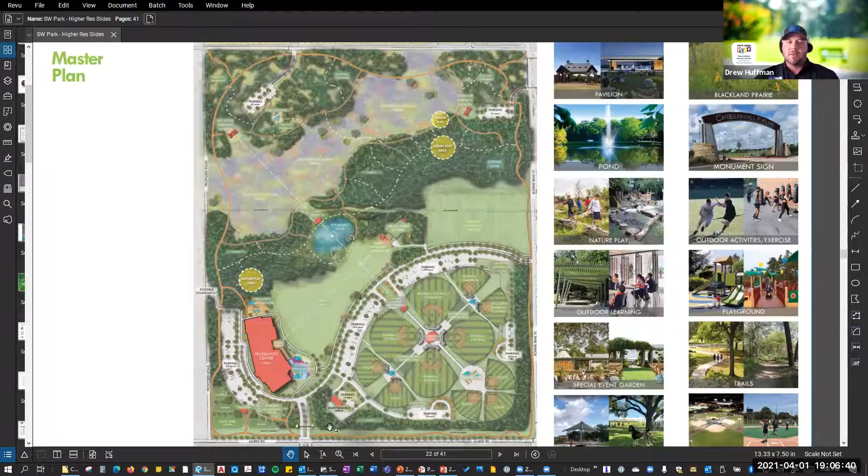What we would like to do between now and this time next year is really cut in that loop trail. There's a lot of mesquites and honey locusts on this property, and we would like to really get that trail established. There's a water line that went in off of All Red Road, so we have a really nice 40-foot buffer where we could put a small gravel parking lot so people could start getting out and using this property. Then potentially we'll start putting up signs saying baseball fields here, rec center here, outdoor learning pavilion here, as you get on the property and start enjoying it as open space for now.

It obviously has tons of open space once it does get constructed. The sooner we start planting those trees in the forested areas, the bigger they'll be once this gets started. That also gives you the ability to work with master naturalists, scouts, and nature groups that want to contribute and help acquire seedlings and things like that to get this ball rolling. But it takes a commitment, like a master plan adopted, to give you the authority to go forward.

We joked earlier, my daughter loves planting anything, and we have 8 trees ready to be planted out here. They started as seeds, as little seedlings, and now they're about 10 inches tall, and she's ready to plant them. She'll enjoy them the rest of her life then. Yes, that's great.